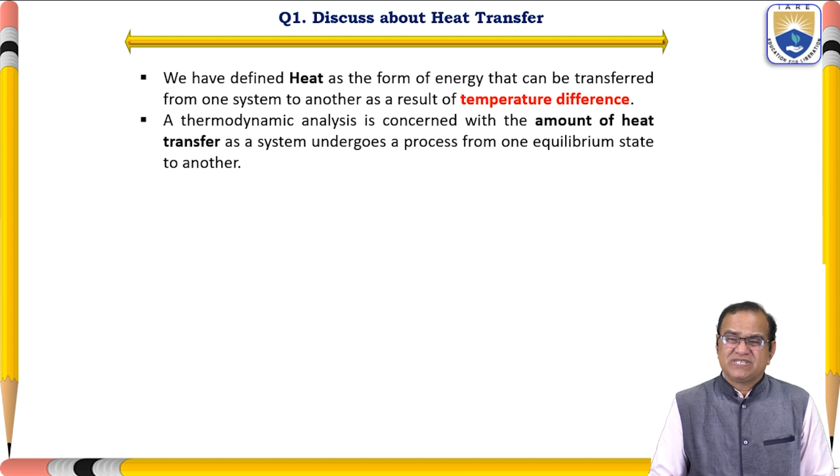A thermodynamic analysis is concerned with the amount of heat transfer as a system undergoes a process from one equilibrium state to another equilibrium state. How much heat is transferred, we have already discussed in the previous classes. The science that deals with the determination of the rates of such energy transfer is heat transfer. So how much energy is transferred in watts, meaning per unit time, is called heat transfer.

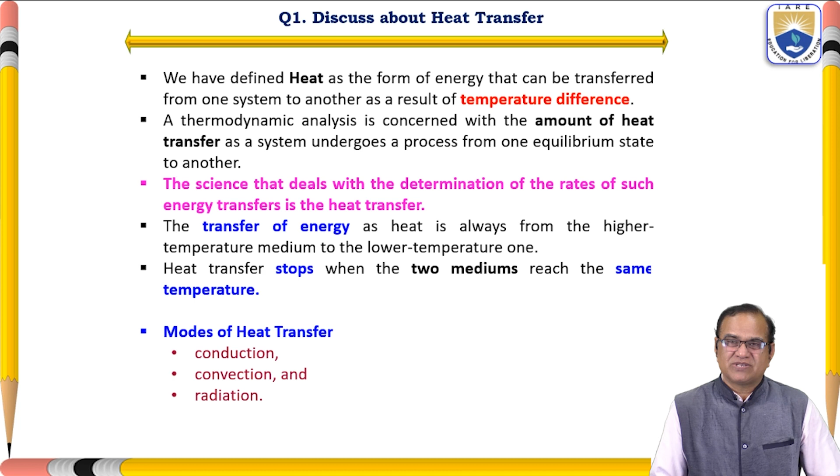The transfer of energy as heat is always from the higher temperature medium to the lower temperature one. Heat transfer stops when the two mediums reach the same temperature. So if one is at 100 and another is at 20, slowly the 100 will reduce and the 20 will increase, and when both reach the same temperature, heat transfer will diminish. For modes of heat transfer, we have conduction, convection and radiation. We have 3 modes of heat transfer.

Now we will discuss the next question. Explain the modes of heat transfer, and the first mode is conduction. We have the 3 modes: conduction, convection and radiation. I will be discussing especially conduction. Conduction is the transfer of energy from the more energetic particles of a substance to the adjacent less energetic ones as a result of interaction between the particles.

Conduction can take place in solids, liquids or gases. In gases and liquids, conduction is due to the collision and diffusion of the molecules during their random motion. So conduction also takes place in gases and liquids, and it happens due to the collision of the molecules of the fluids. In solids, it is due to the combination of vibration of the molecules in a lattice and the energy transport by free electrons.

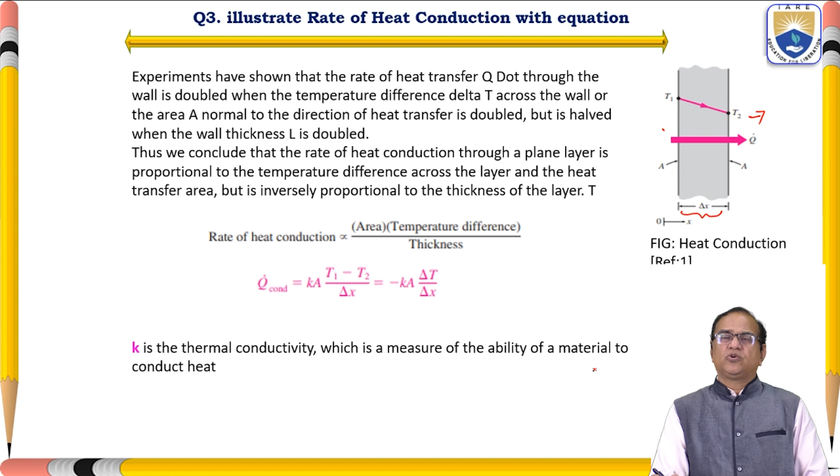Thus, we conclude that the rate of heat conduction through a plane layer is proportional to the temperature difference across the layer and the heat transfer area, but is inversely proportional to the thickness of the layer. Here, Q dot is equal to KA (T1 minus T2) by delta X, or minus KA delta T by delta X. T1 is the temperature of the first wall, T2 is the temperature of the second wall, delta X is the length of the material, and K is the conductivity, which measures the ability of the material to conduct heat. It is a continuous process.

If you see here, in the limiting case, if we make delta X tend to 0, we can write the equation in differential form, that is Q dot of conduction is equal to minus KA dT by dx. Here dT by dx is the temperature gradient, which is the slope of the temperature curve on a T-x diagram, the rate of change of T with X at a location X. Area A is always normal to the surface. The minus sign ensures that heat transfer in the positive X direction is a positive quantity.

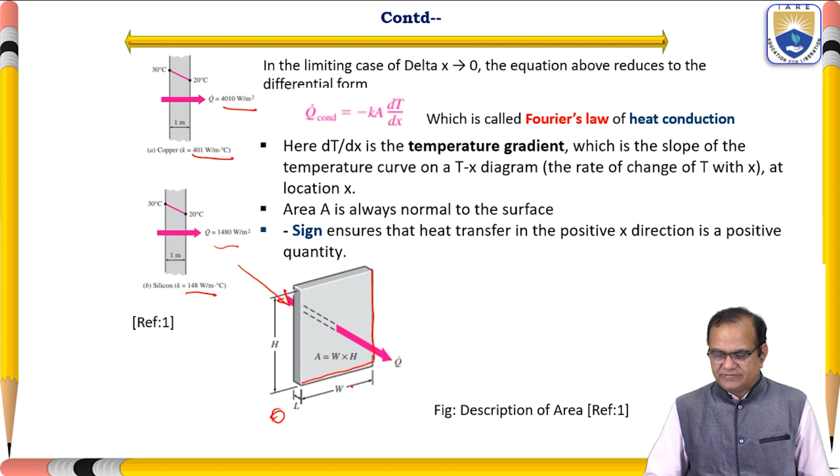So this area is the width and the height, if heat is entering from this side. So we will not take L for this area, we will take W and H. Here, if it is 1 meter, from 30 degrees centigrade to 20 degrees centigrade, and it is copper, you can calculate that this heat is 4010 watt per meter square. So if you increase this 1 meter and the area is different, or the material is silicon with its value, the Q will be different. And this is called Fourier's law.

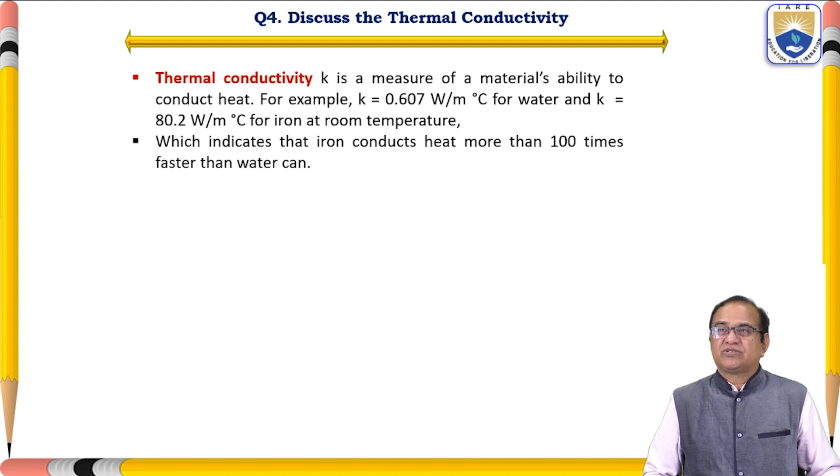Discuss the thermal conductivity. Thermal conductivity, denoted by K, is a measure of a material's ability to conduct heat. For example, K is 0.607 watt per meter degree centigrade for water, and K for iron is 80.2 watt per meter degree centigrade at room temperature. So iron has much more conductivity than water, more than 100 times, which indicates that iron conducts heat more than 100 times faster than water. Thus water is a poor heat conductor relative to iron, although water is an excellent medium to store thermal energy. So the storing capacity and this are inversely proportional.

So we can say that water is a poor heat conductor relative to iron, although water is an excellent medium to store energy. Thermal conductivity of a material can be defined as the rate of heat transfer through a unit thickness of the material per unit area per unit temperature difference. It is a measure of the ability of the material to conduct heat. A high value indicates that the material is a good heat conductor. A low value indicates that the material is a poor heat conductor or insulator.

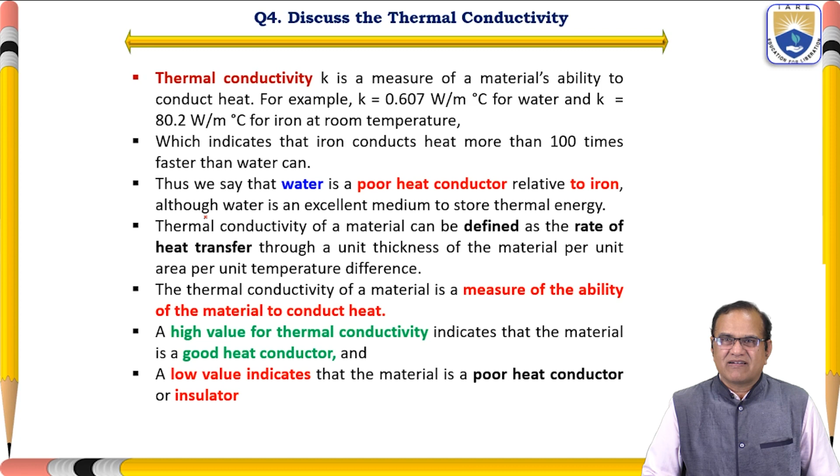Now I will go to the next question, question number 5. Illustrate convection heat transfer with a diagram. So we have done conduction. Now what is convection? Convection is the mode of energy transfer between a solid surface and the adjacent liquid or gas that is in motion, and it involves the combined effect of conduction and fluid motion. The faster the fluid motion, the greater the convection heat transfer. In the absence of any bulk fluid motion, the transfer between a solid surface and the adjacent fluid is by pure conduction.

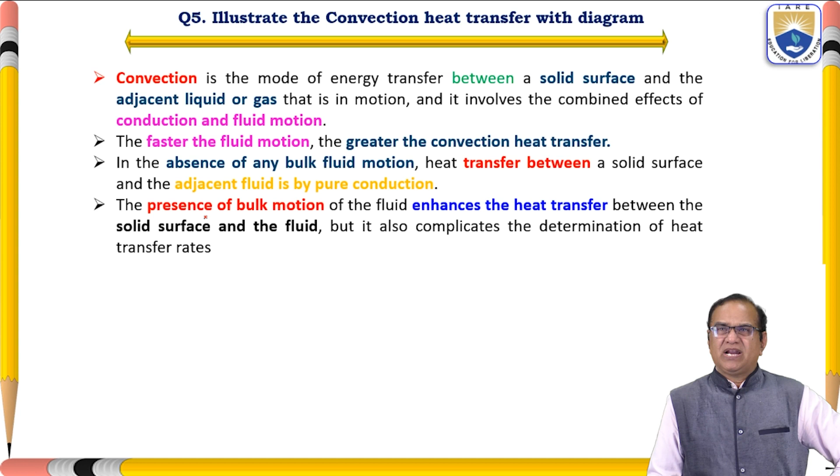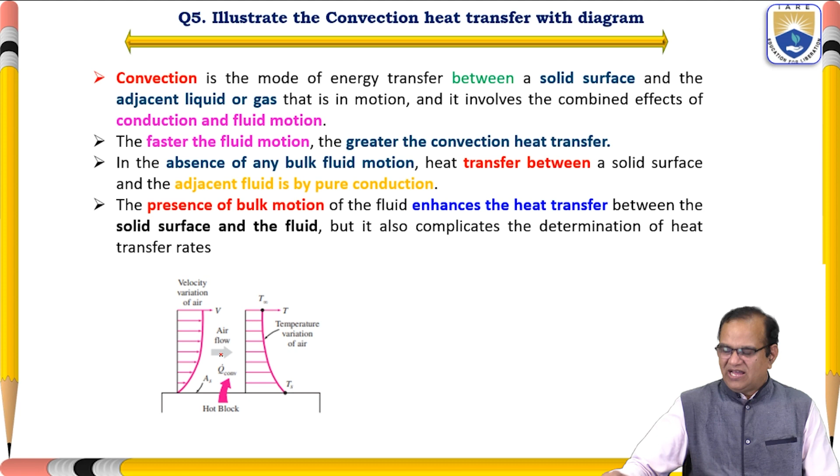So it is a temperature variation of air, and here it is air flow and how much heat is rejected or how much heat is transferred. It is shown in this diagram. Let's discuss the types of convection. So we have two types, that is the forced convection and the natural convection.

Convection is called forced convection if the fluid is forced to flow over the surface by external means such as a fan, pump or the wind. So if it is not natural and we are giving some additional force to make the flow of the air or the flow of the water or any medium, which we are making by some machines, pressing it to move faster, then it is a forced convection.

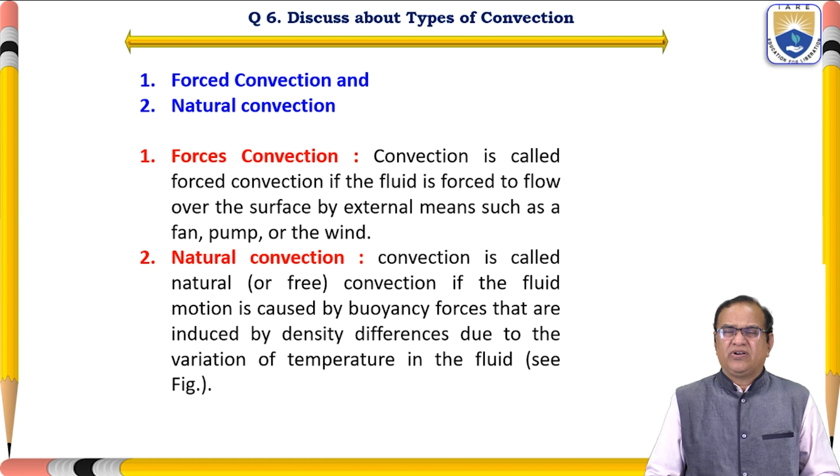Convection is called natural or free convection if the fluid motion is caused by buoyancy forces that are induced by the density difference due to the variation of temperature in the fluid. See this figure here. Here we have the forced convection. So in this, first we will see the natural convection.

Here we have the hot egg, and this hot egg will take a lot of time to cool naturally. Slowly it is happening. But if you want to cool it faster, then you can put a small fan, and all this motion will be in this direction, and so this is called the forced convection, and this is called the natural or the free convection. So that is the difference between these two.

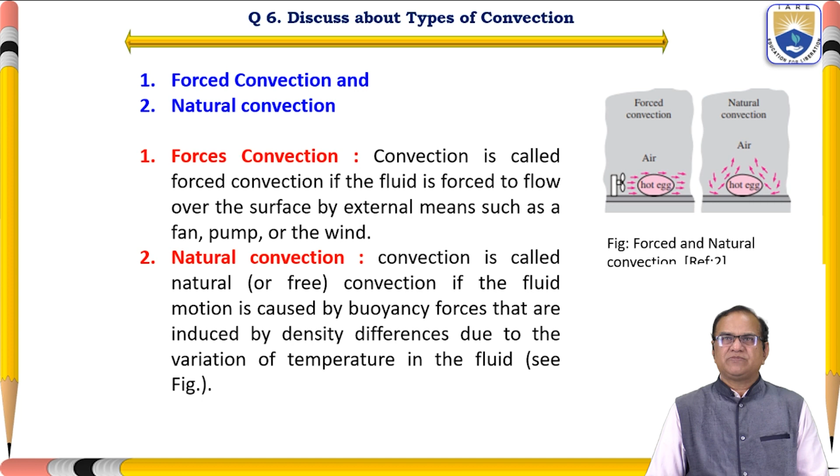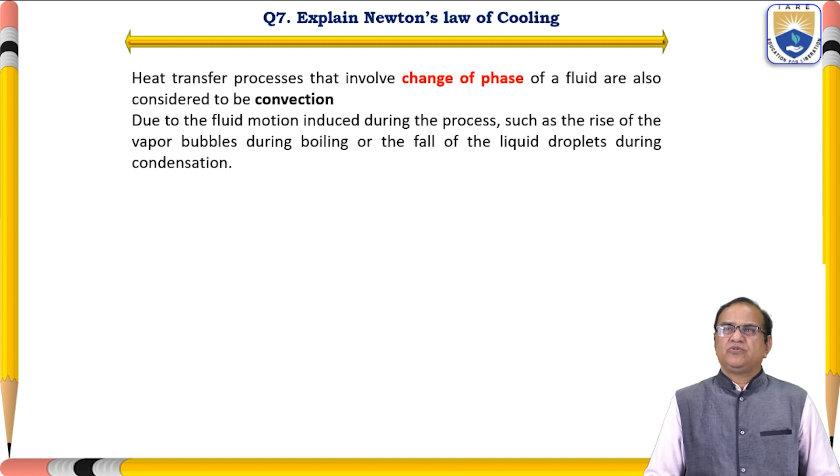Now I will explain Newton's law of cooling, a very important law which we are going to discuss. Heat transfer processes that involve change of phase of a fluid are also considered to be convection, due to the fluid motion induced during the process, such as the rise of vapor bubbles during boiling or the fall of liquid droplets during condensation.

Despite the complexity of convection, the rate of convection heat transfer is observed to be proportional to the temperature difference and is conveniently expressed by Newton's law of cooling. So the rate of such convection is described by Newton, and it is called Newton's law of cooling. It states that Q dot convection is equal to h As (Ts minus T infinity), where h is the convective heat transfer coefficient, in watt per meter square degree centigrade.

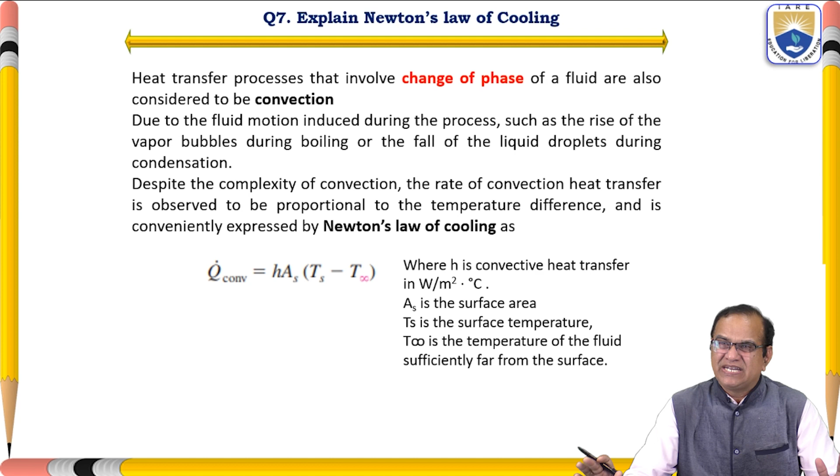As is the surface area. Ts is the surface temperature, and T infinity is the temperature of the fluid sufficiently far away from the surface. So we have seen here Newton's law of cooling, that Q convection is equal to h As (Ts minus T infinity), and all terms I have described. So the convection heat transfer coefficient is h.

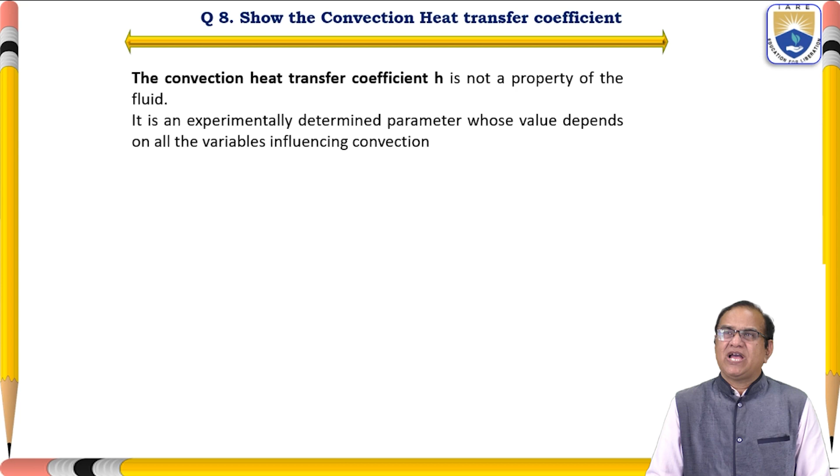The convection heat transfer coefficient h is not a property of the fluid. It is an experimentally determined parameter whose value depends on all the variables influencing convection, such as surface geometry, the nature of the fluid motion, the properties of the fluid, and the bulk fluid velocity. Typical values for h are given in this table. You can see them for free and forced convection.

For free convection of gases, it is 2 to 25. For free convection of liquids, it is 10 to 1000. For forced convection of gases, it is 25 to 250. It means more than 10 times. And for forced convection of liquids, it is 50 to 20,000.

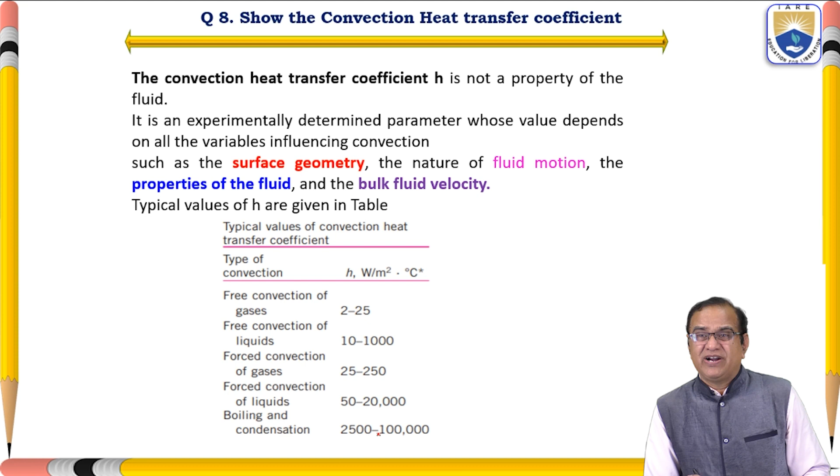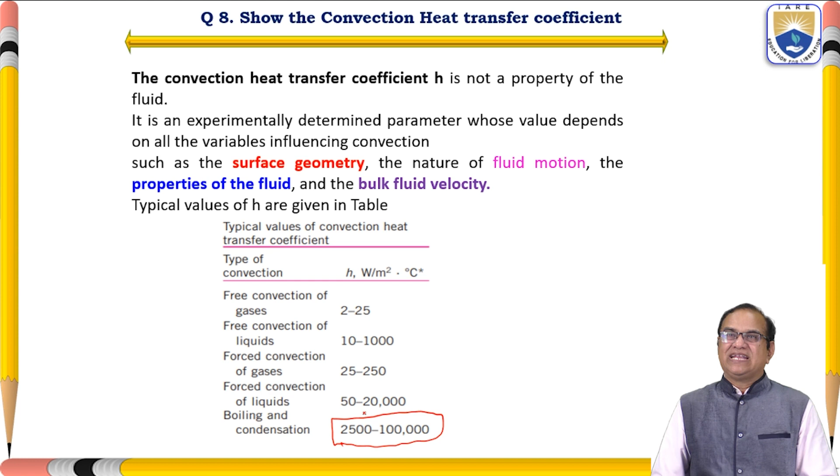And for boiling and condensation, when there is a phase change, this value of h is very high, 2500 to 100,000 watt per meter square degree centigrade. So for condensation and boiling, a very high amount of heat transfer is taking place. Describe thermal radiation.

So as of now, we are done with conduction and convection. We have the three modes of heat transfer: conduction, convection, and radiation. We have covered a few questions on conduction and on convection. Now I am discussing thermal radiation.

Thermal radiation, or radiation, is the energy emitted by matter in the form of electromagnetic waves or photons as a result of changes in the electronic configuration of the atoms or molecules. Unlike conduction and convection, the transfer of heat by radiation does not require the presence of an intervening medium. In fact, heat transfer by radiation is fastest, at the speed of light. It suffers no attenuation in a vacuum. This is how the energy of the sun reaches the earth.

In heat transfer studies, we are interested in thermal radiation, which is the form of radiation emitted by bodies because of their temperature. It differs from forms of electromagnetic radiation such as X-rays, gamma rays, microwaves, radio waves, and television waves that are not related to temperature. All bodies at a temperature above absolute zero will emit thermal radiation. So above absolute zero, every body will emit radiation.

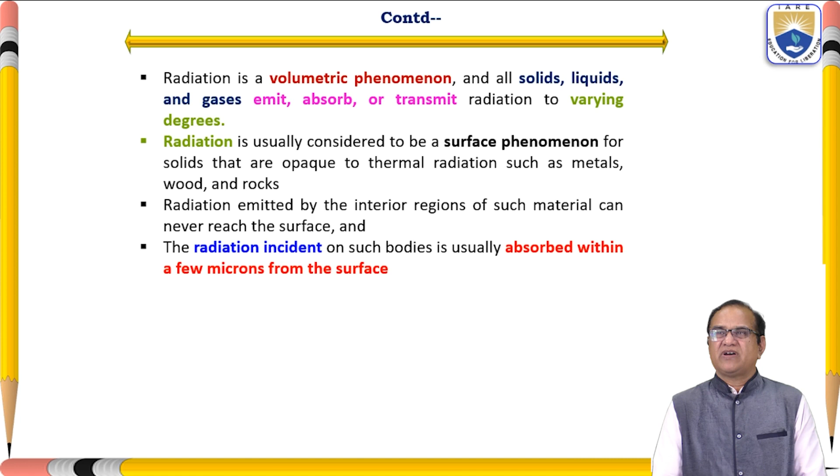Radiation is a volumetric phenomenon, and all solids, liquids, and gases emit, absorb, or transmit radiation to varying degrees. Radiation is usually considered to be a surface phenomenon for solids that are opaque to thermal radiation, such as metals, wood, and rock. Radiation emitted by the interior regions of such materials can never reach the surface, and the radiation incident on such a body is usually absorbed within a few microns of the surface.

Now, I will discuss question number 10. State the Stefan-Boltzmann law. The maximum rate of radiation that can be emitted from a surface at a thermodynamic temperature Ts in Kelvin or Rankine is given by the Stefan-Boltzmann law as Q emit = σ As Ts^4, and this σ is equal to 5.670 × 10^-8 W/m²·K^4.

The idealized surface that emits radiation at this maximum rate is called the black body, and the radiation emitted by the black body is called black body radiation. So if this much radiation is emitted, that body is a black body, and the radiation is called black body radiation. The radiation emitted by all real surfaces is less than the radiation emitted by the black body at the same temperature. So we have to add some constant value.

So here we can see that for a black body, when epsilon is equal to 1, if the temperature is 400 Kelvin, it will be emitting 1452 W/m² of area. By this equation we can find this value. And if it is not a black body, the emission of radiation Q dot is equal to ε σ As Ts^4, where epsilon is called the emissivity of the surface, and its value ranges from 0 to 1. For the black body it is 1, and for a body that is not radiating at all, it will be 0.

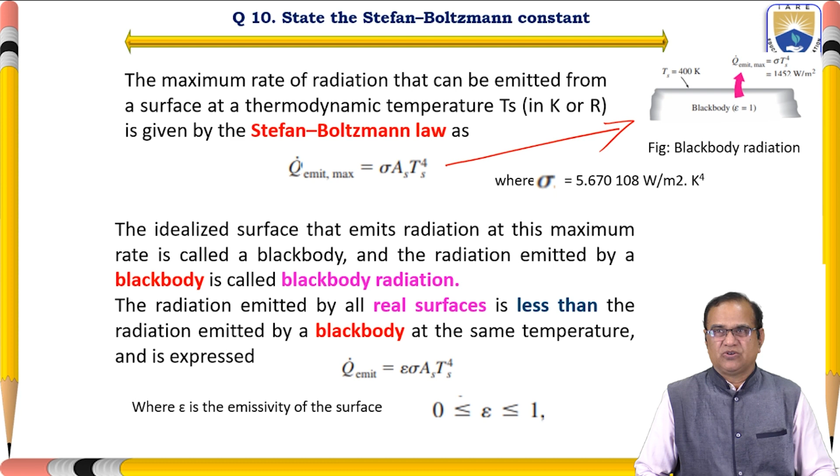Define the absorptivity. Another important radiation property of a surface is its absorptivity alpha, which is the fraction of the radiation energy incident on a surface that is absorbed by the surface. Like emissivity, its value is from 0 to 1. So how much percentage it is absorbing and how much it is reflecting. A black body absorbs the entire radiation incident on it, so the black body is a perfect absorber, where alpha is equal to 1, as it is a perfect emitter. In general, both emissivity and absorptivity of a surface depend on the temperature and the wavelength of the radiation.

Next, I will discuss Kirchhoff's law. Kirchhoff's law of radiation states that the emissivity epsilon and the absorptivity alpha of a surface at a given temperature and wavelength are equal. So for a given temperature and a given wavelength, lambda, both are equal. In many practical applications, the surface temperature and the temperature of the source of incident radiation are of the same order of magnitude, and the average absorptivity of a surface is taken to be equal to the average emissivity.

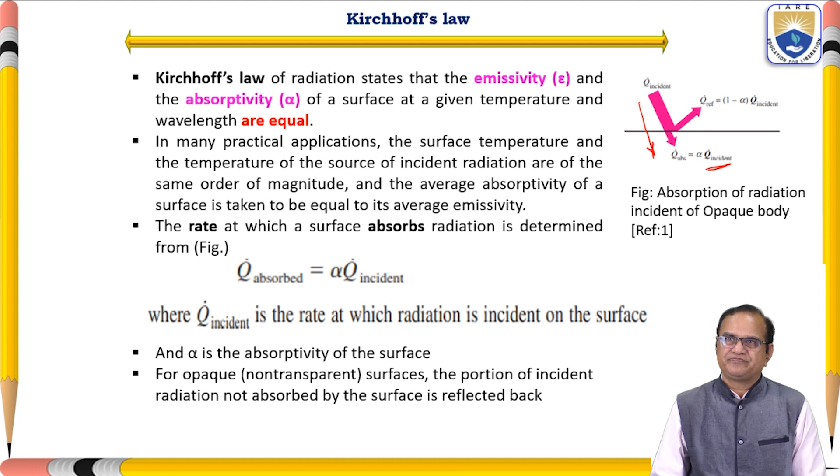The difference between the rates of radiation emitted by the surface and the radiation absorbed is the net radiation heat transfer. If the rate of radiation absorbed is greater than the rate of radiation emission, the surface is said to be gaining energy by radiation. Otherwise, the surface is said to be losing energy by radiation. Since it depends on the properties of the surfaces, their orientation relative to each other, and the interaction of the medium between the surfaces with radiation, this is very important.

Now the next question, question number 12: what is the rate of heat radiation? When a surface of emissivity ε and surface area As at a thermodynamic temperature Ts is completely enclosed by a much larger or black surface at a thermodynamic temperature T surrounding, separated by a gas such as air that does not intervene with radiation.

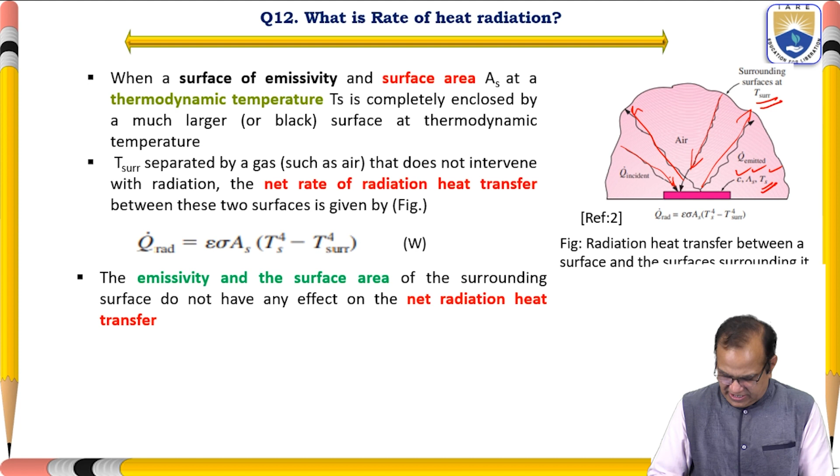13th question: discuss the radiation heat transfer. Radiation heat transfer to or from a surface surrounded by a gas such as air occurs parallel to conduction or convection if there is bulk gas motion between the surface and the gas. Thus, the total heat transfer is determined by adding the contribution of both heat transfer mechanisms. For simplicity and convenience, this is often done by defining a combined heat transfer coefficient h combined that includes the effect of both convection and radiation.

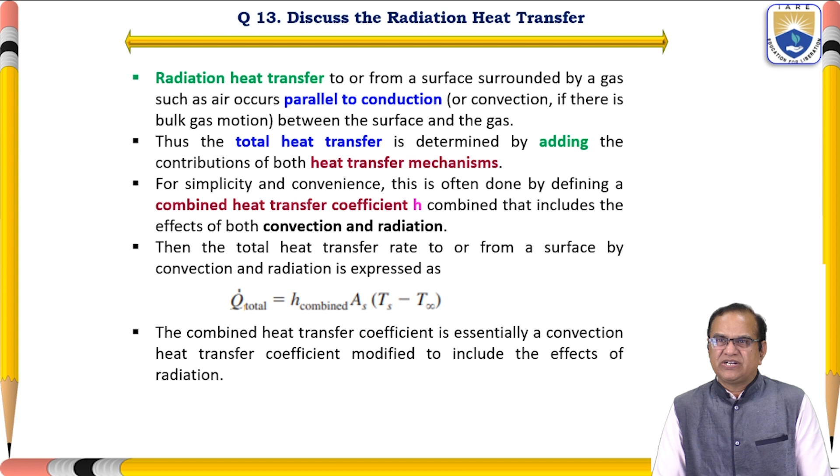Then the total heat transfer rate to or from a surface by convection and radiation is expressed as Q dot equals h combined As (Ts minus T infinity). The combined heat transfer coefficient is essentially a convection heat transfer coefficient modified to include the effect of radiation.